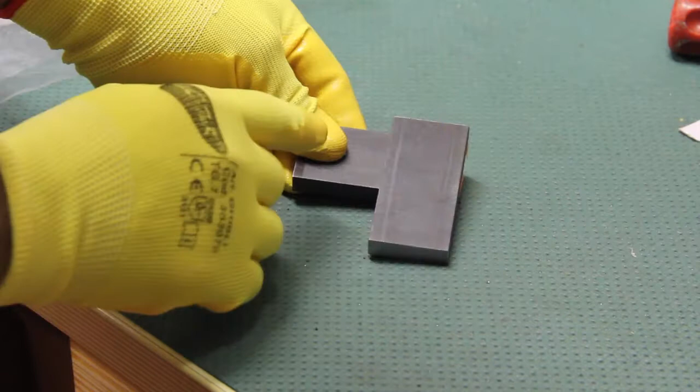Shear force is a force that tries to move one part in one direction and the other part in the opposite direction. Imagine that the two parts are glued together.

Which is the component that keeps the two parts together? It is the surface of the glue that keeps the two parts together, and that has to withstand the applied forces. Therefore, we have to use this area to calculate the ability of the structure to withstand the applied forces.

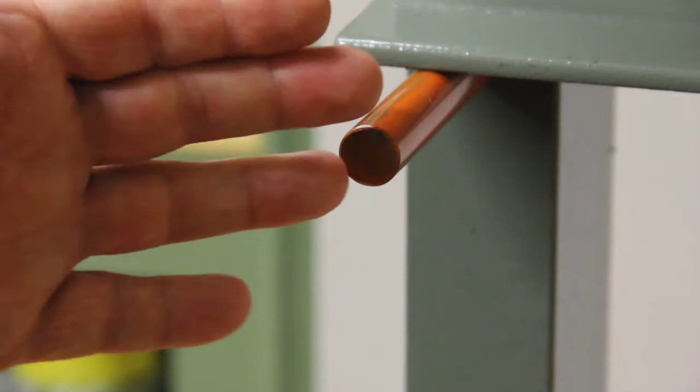While it's quite easy to calculate for the pin, because it is just the section, the diameter of the pin, it's a whole other story to know the surface of the welding. So I'm going to make a sample to find out which sides have the beads of the weldings.

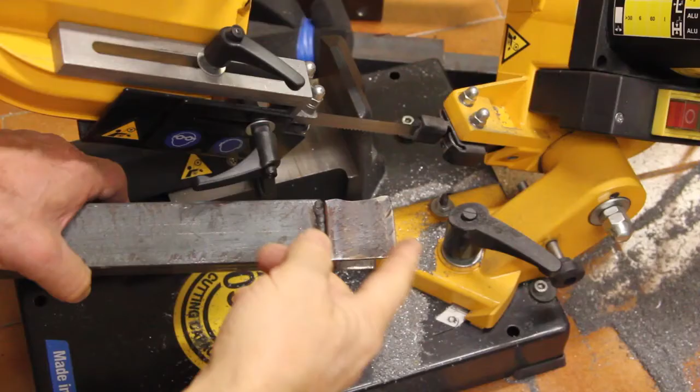This is a sample that I just welded to mimic this part here, this column with this part, and the transverse that is below here with this part. I will cut this part in this direction to see through here how the weld went, and in this direction, in this plane, to see how this weld went.

However, because there is a problem holding the part on the vise of the saw, I have to weld a piece of scrap tube here.

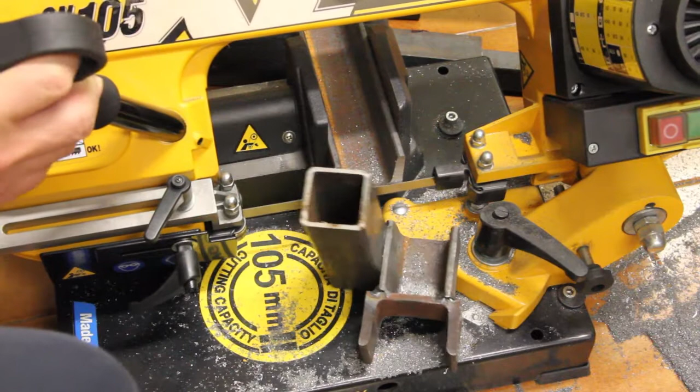Now let's cut here in this direction. Of course I will cut part of the tube too, but don't worry about that.

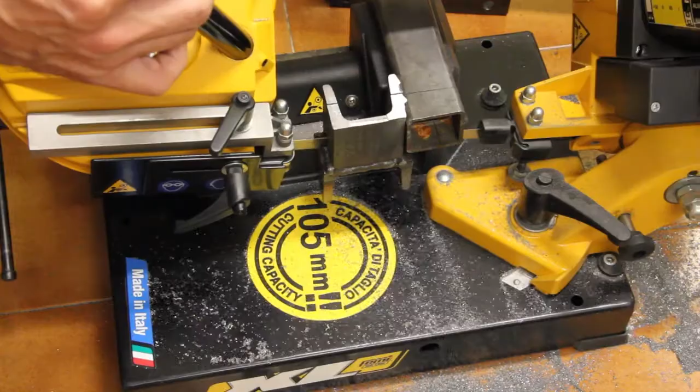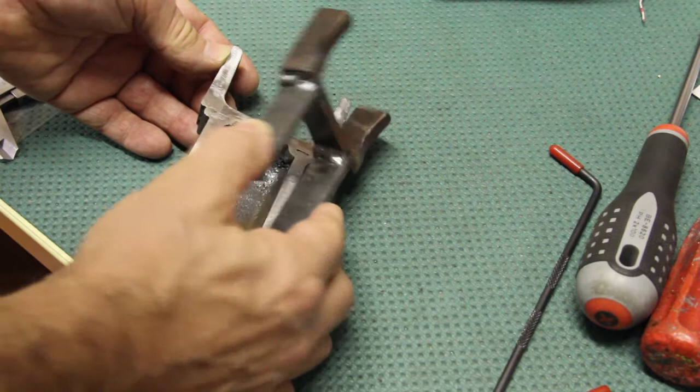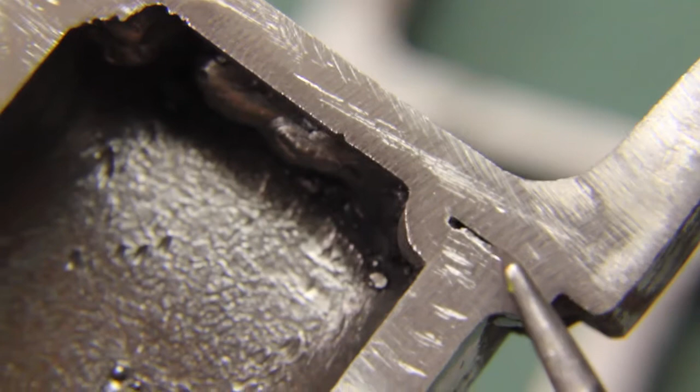This is the section cut, and we can see here clearly the junction here and here, and the weldings here and here. The size of the welding is roughly 4 millimeters here, approximately 3 millimeters here, and here we have 4.

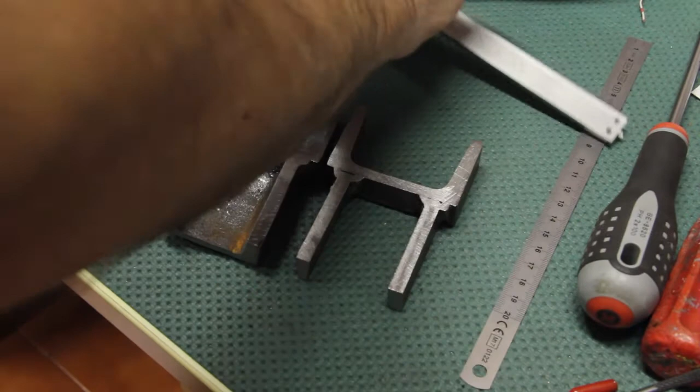Let's check better. The worst case is this welding that is only 3 millimeters in size and width. This is the worst welding, the worst condition.

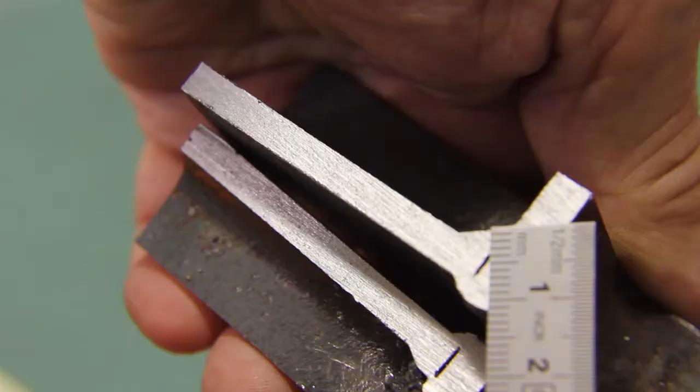Also, I've cut this part in two to see the section in this plane. So in this case the weld didn't go very well here, but...

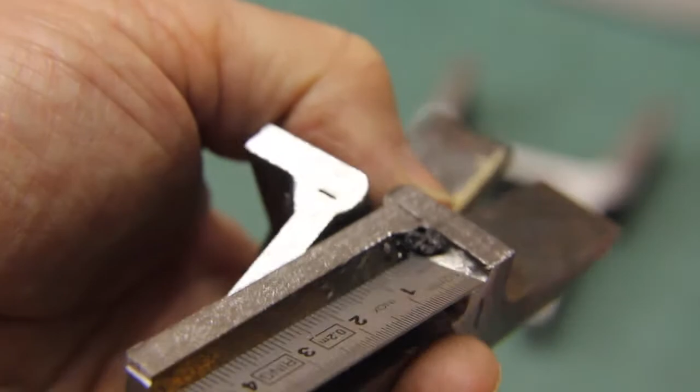We have to keep in mind that the welding is not constant, and this point is just at the beginning and the corner. On average the welding is distributed better along the line of weld, but here much better. A section size of about 3 millimeters is, on average, a conservative number to take into account.

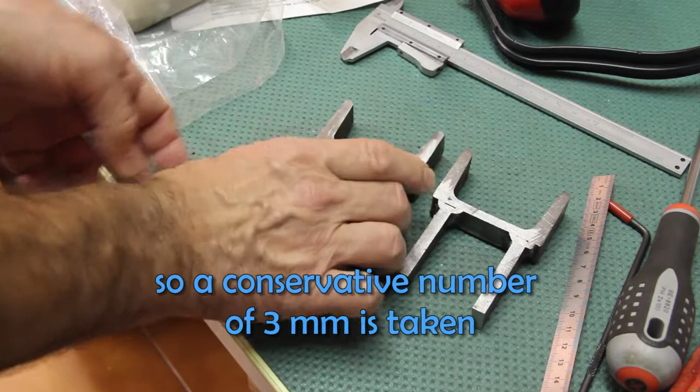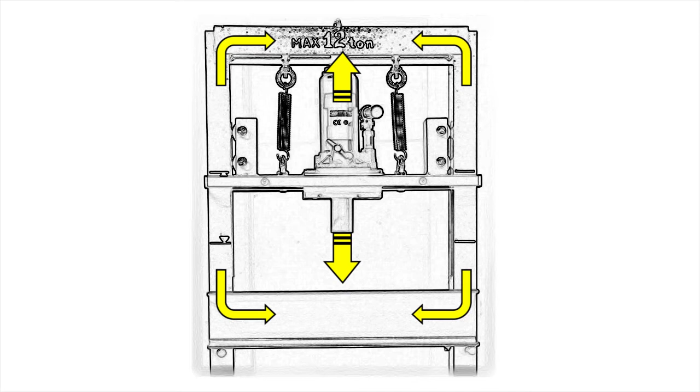So let's see how the forces are distributed around the frame. We have the forces up and down that are exerted by the jack, and the frame resists these forces, represented by the arrows around the frame. These are the joints that are the critical points.

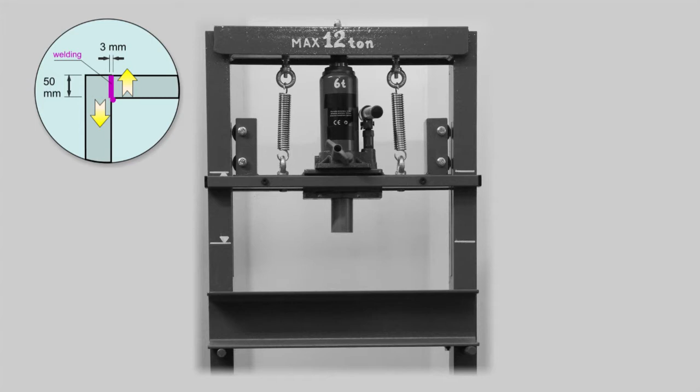In this upper corner we see one of the joints that is welded, and we see the forces in opposite directions, and therefore the joint is subject to a shearing force. The purple shape represents the welding, and here we see the surface of the weld bead where the force actually happens.

And in this lower corner we see the pin where the bar lies, represented in orange, and the forces again are in opposite directions, and therefore the pin is subject to a shearing force.

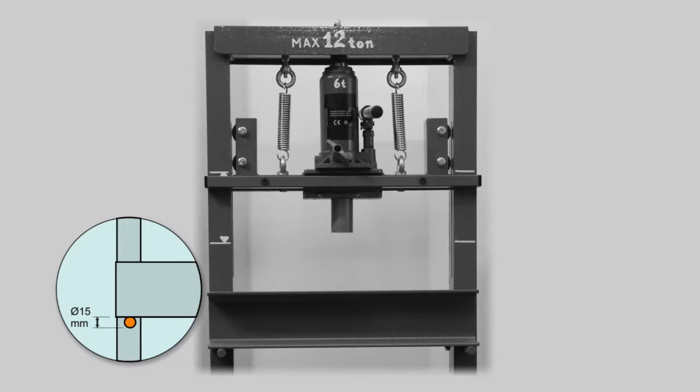Now let's talk about the math. And on this occasion, I have to say that in the previous video where I showed the making of the press, I put up a card with a load of typos.

I'm sorry for that, but that is what happened when one does things too late in the night instead of sleeping. The first thing to do is look at the surface of the weldings.

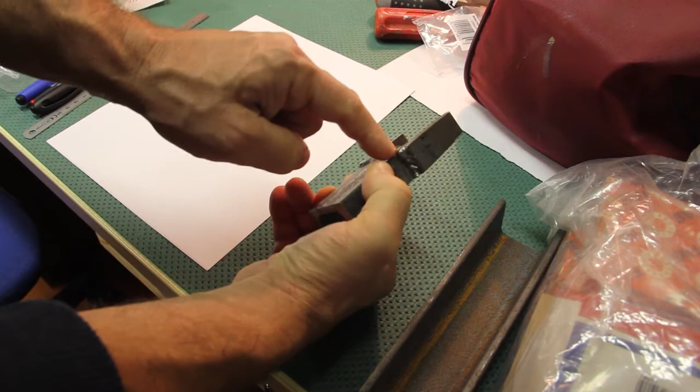Keep in mind that we have two seams, one that goes all around the external side and one that goes all around the internal side. We can bring this part, a profile that comes from the same kind of profile, and take the shape of it to get an idea where the weldings go.

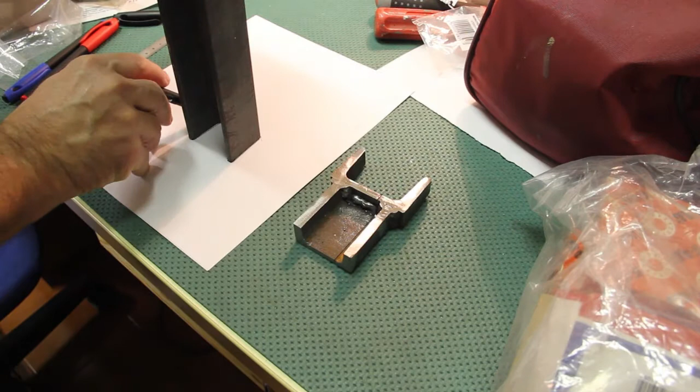And measure the height, which is 37 millimeters. So let's write here the height, 37, and the width that is 50 millimeters.

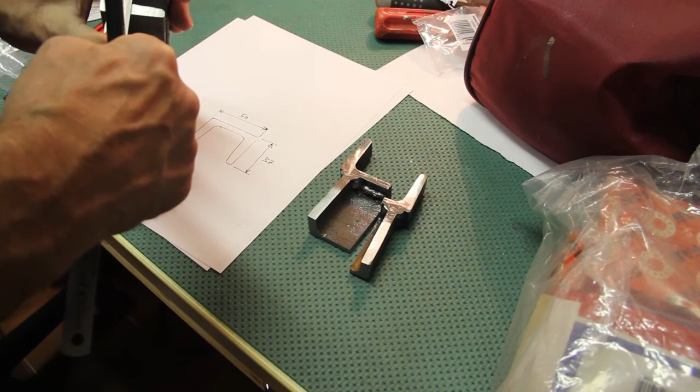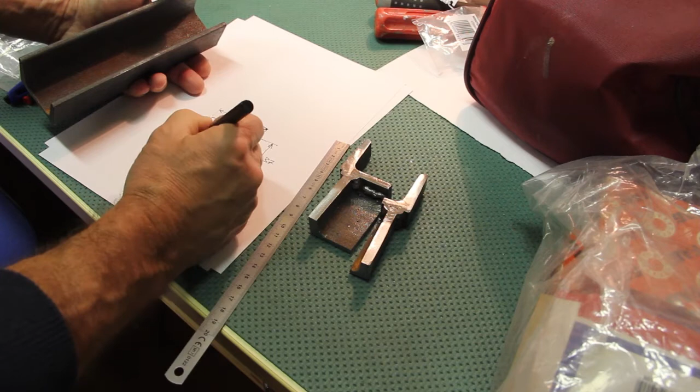50 millimeters, and the internal side is about 35 millimeters. So here and here are 35 millimeters, and from here are 35 again, 30, a little bit less. Let's see with this, yes, it is a little bit less, so it is 32 millimeters.

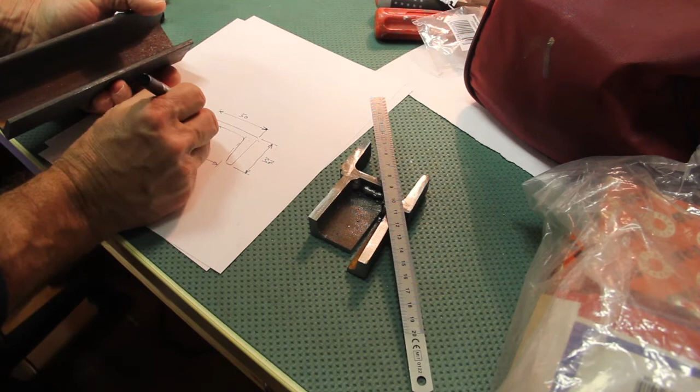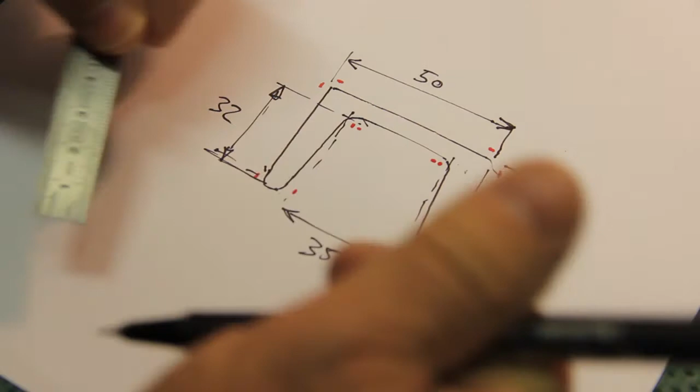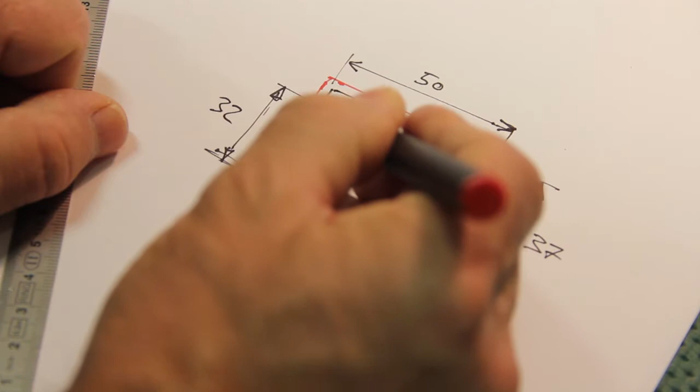The inside is 32. So here around we have a bead that we consider just 3 millimeters. Actually here we have something that is like so and like so, the bead that goes all around.

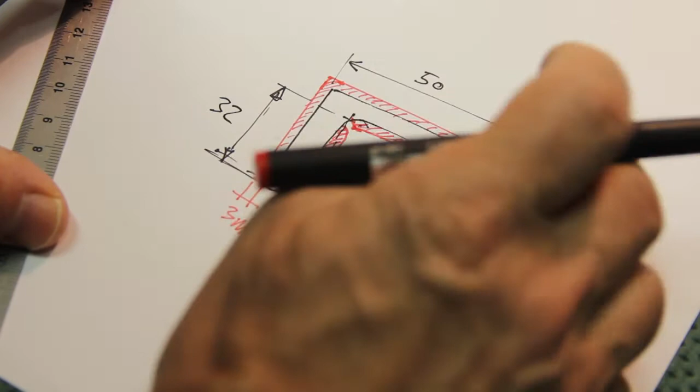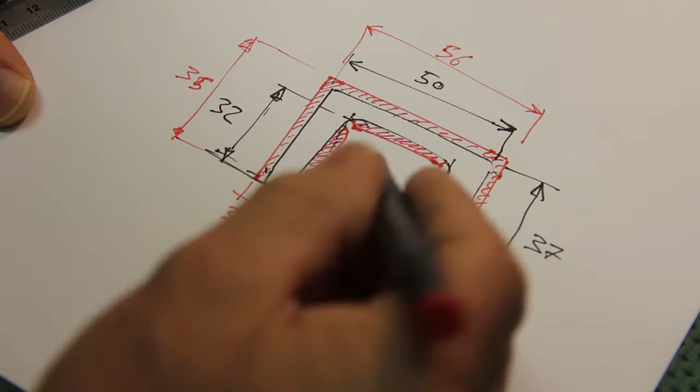So we consider this width 3 millimeters as an average, as a worst condition, and therefore we have here a height of 35 millimeters and a width of 56 millimeters, and here instead we have a little bit less, so we can consider this maybe 2 or 3 millimeters less, so say 28.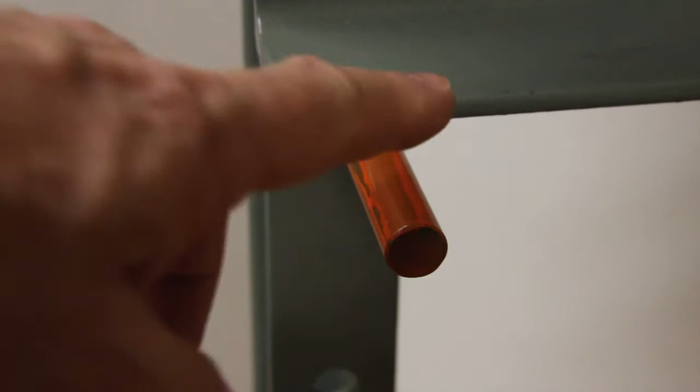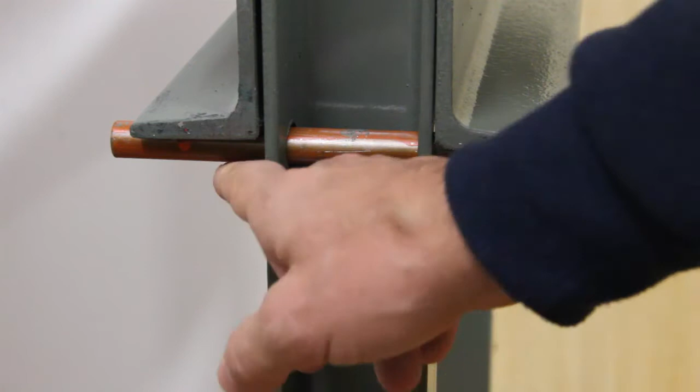And here we have 35 less, say 5 millimeters, 30 millimeters. And in the lower corner we have the pins that are 15 millimeters, and we have to keep in mind that we have two sides, so we have a surface here and a surface here, in two sections that resist the pressure, the force that goes down.

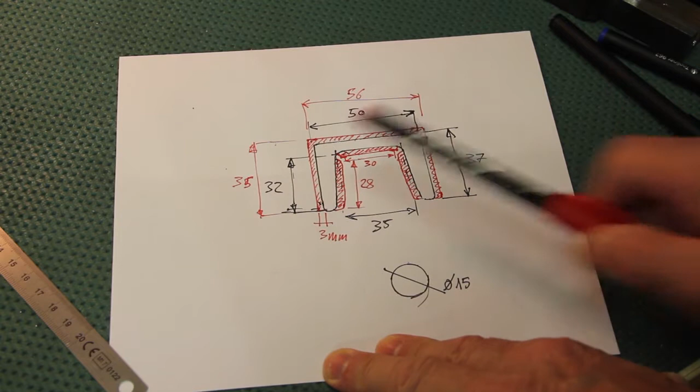Well, I made a mistake. This is not 35, I've taken this number instead of this one, so it is 3 millimeters more than 37. Therefore this is not 35, but it is 40. So let's do the math.

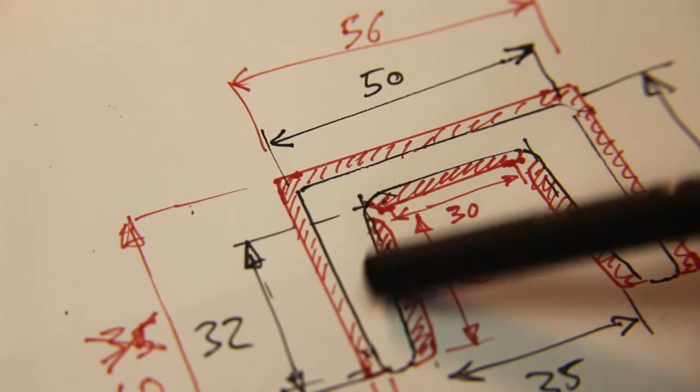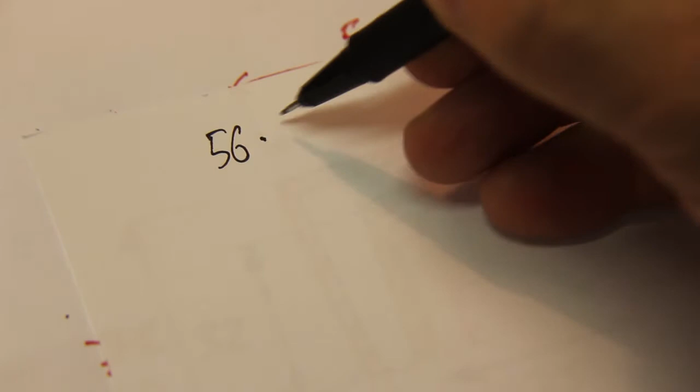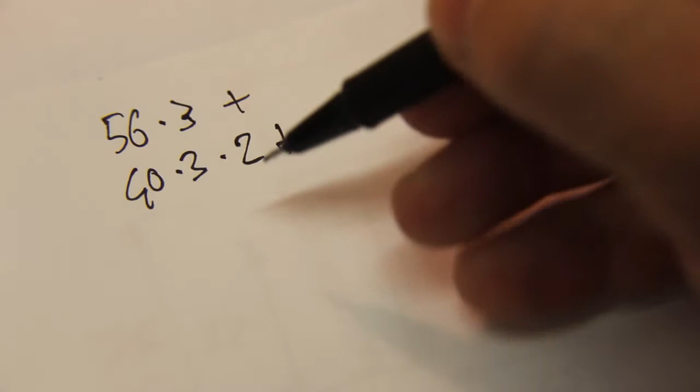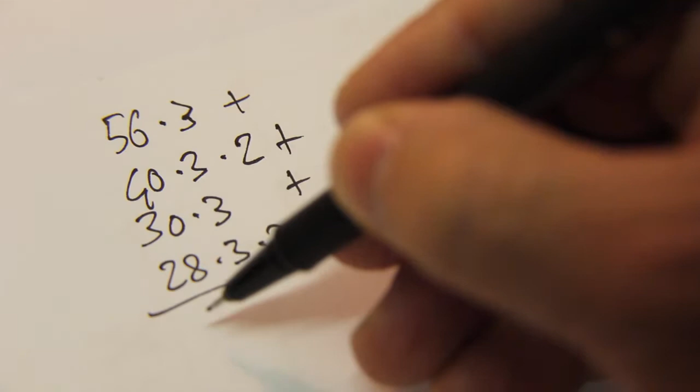We sum all the surfaces, we calculate the surfaces and sum all together. So we have 56 millimeters times 3 millimeters, plus 40 millimeters times 3 times 2, because we have 1 and 2 seams, plus 30 times 3 plus 28 times 3 times 2, which gives us the beast number of 666 square millimeters.

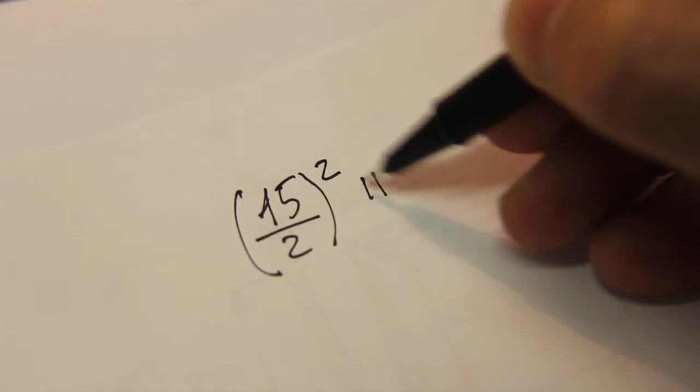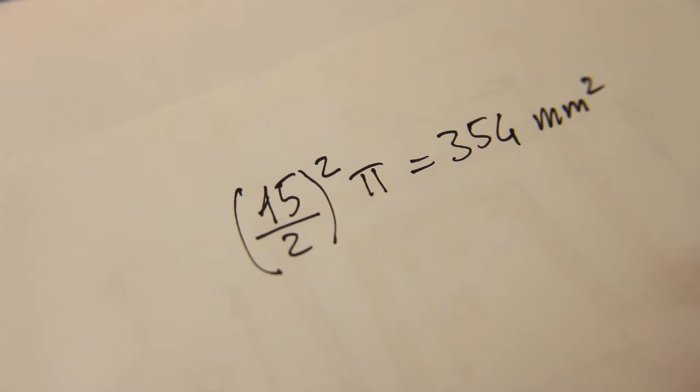Now for the pin, we have a diameter of 15 millimeters, so we calculate this by dividing the diameter by 2 to find the radius, squaring it and multiplying by pi to get 354 square millimeters. Since we have two sides, we multiply this by 2, so 354 times 2 gives us 708 square millimeters.

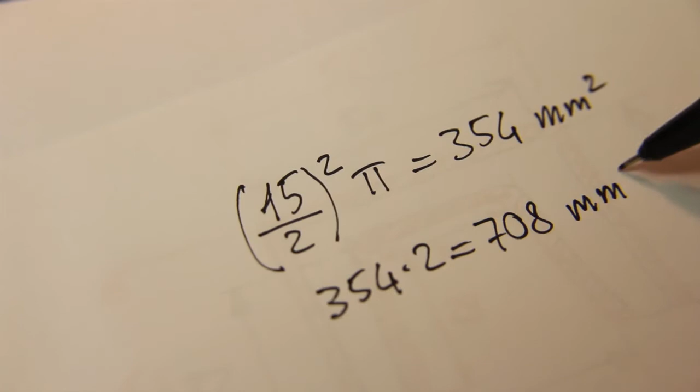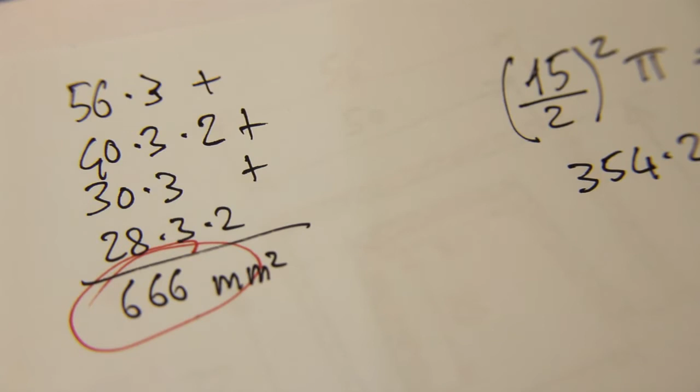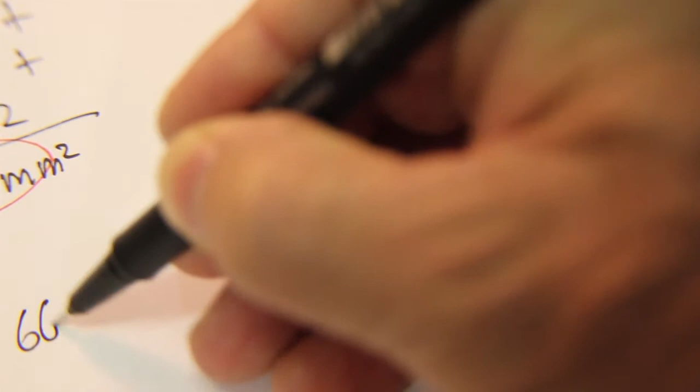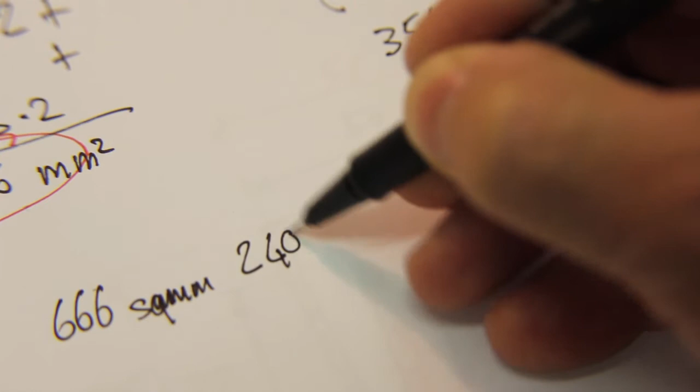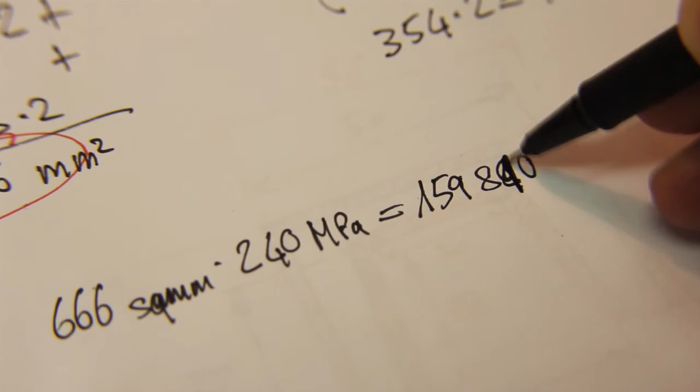So let's move on. We take this number, 666, and multiply this square millimeters times 240 megapascal, which is the strength of the material, and we get 159,840 Newton, which is approximately equal to 160 kilonewton.

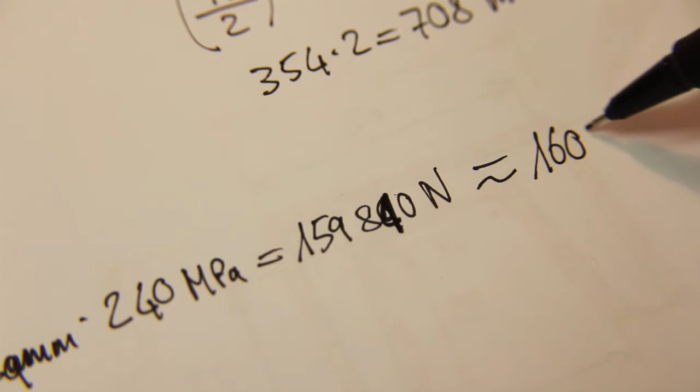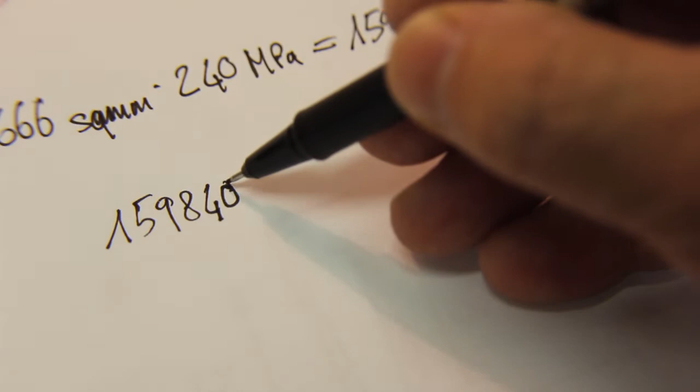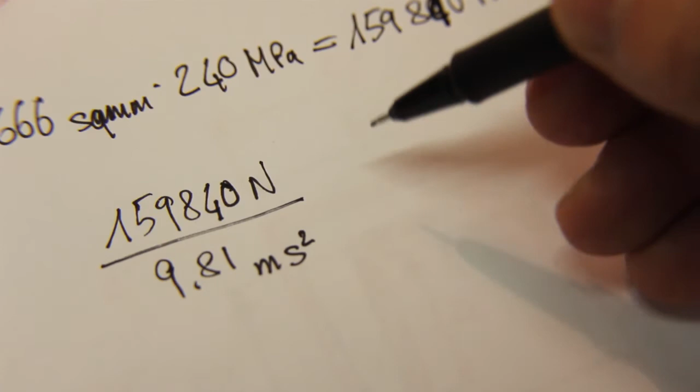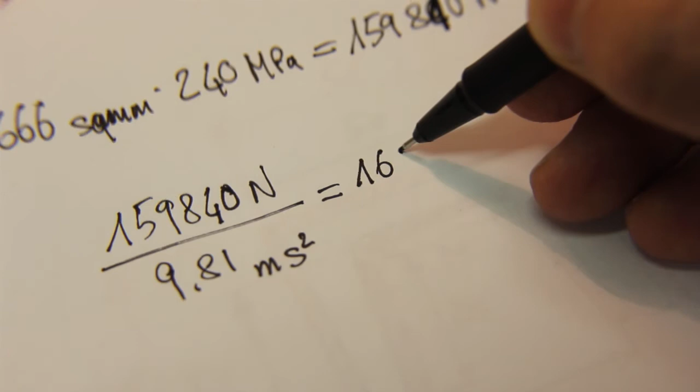So let's take this number, 159,840 Newton, divided by 9.81 meter per square second, which is the gravitational acceleration, which gives us 16,294 kilograms, which is approximately 16.3 tons, metric tons of course.

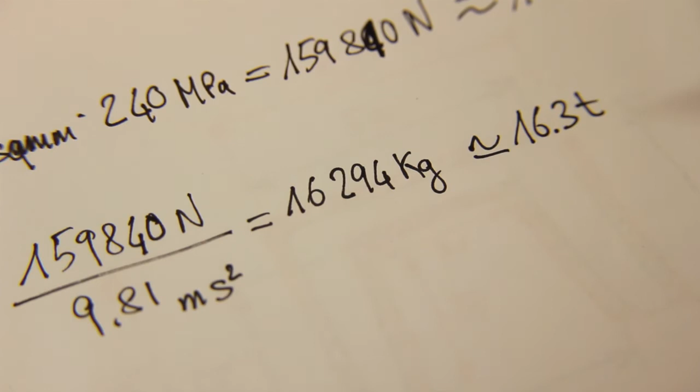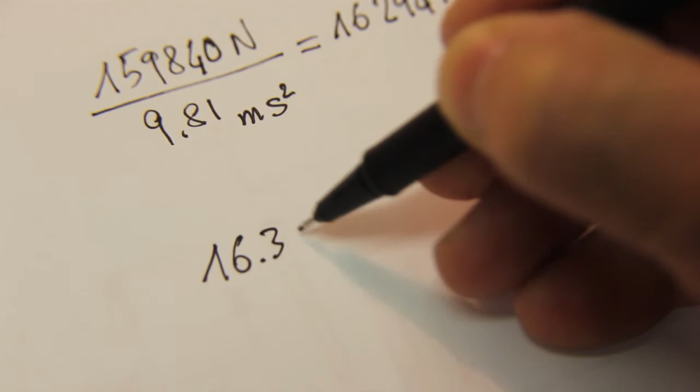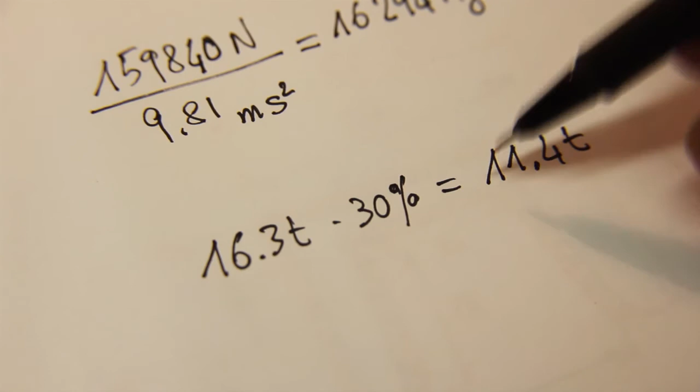So let's take a margin of 30%. 16.3 tons minus 30%, and we get the final value of 11.4 tons, which is the final number that our structure should withstand under force.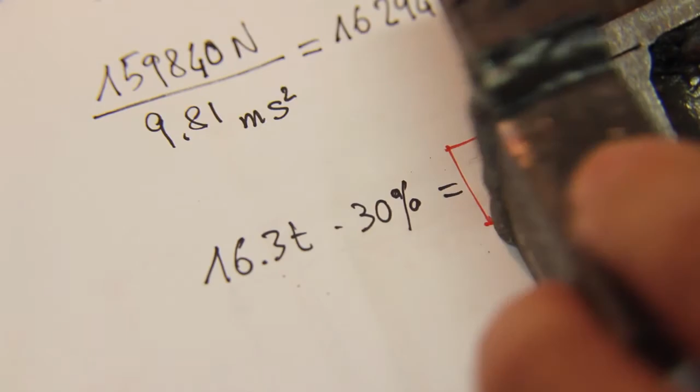However, that depends on the welding, and if the welding is well made, that number can be trusted, but well, everybody knows their own ability of welding. Mine is not so good. If you look around on YouTube, you will find a lot of people that have made a press with a jack bottle.

So I did mine, but at the same time I also wondered, is the frame able to withstand the force exerted by the jack? Despite not being a mechanical engineer, I've tried to figure out a way to calculate, even in a simple, crude way, just to have an idea if the frame is able to withstand the force applied, because depending on the arrangement of the parts under pressure, if the frame fails, it could be quite dangerous. Okay, that's all, folks.